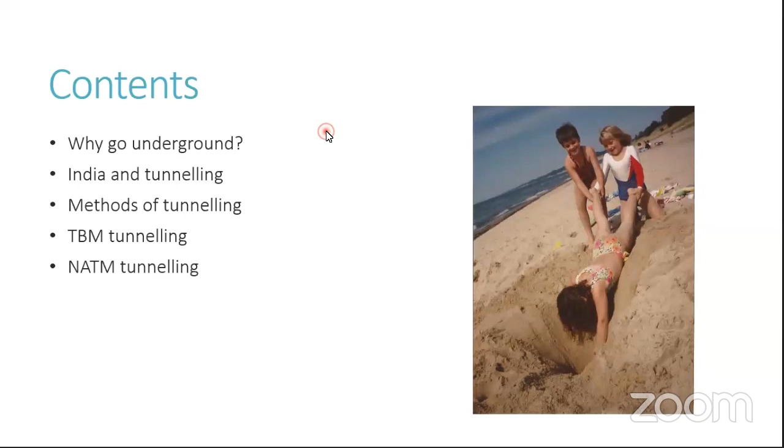This brings us to why do we want to go underground? Why are we exploring the space underneath the ground surface?

As per the predictions, the world population growth is a phenomenon that has seen a few peaks in previous centuries, when we started agriculture, and then another peak when the medical revolution came in. Further, when the industrial revolution kicked on, and now we are seeing another peak, another drift in the population, and this time the population rise is much more in developing countries than in developed countries.

So India, being one of the largest countries, is going to see a rise in population, which will put a lot of demand on infrastructure, to move those people, to provide housing for them, to provide transportation networks, to provide developmental opportunities, healthcare infrastructure, education infrastructure, offices, and much more.

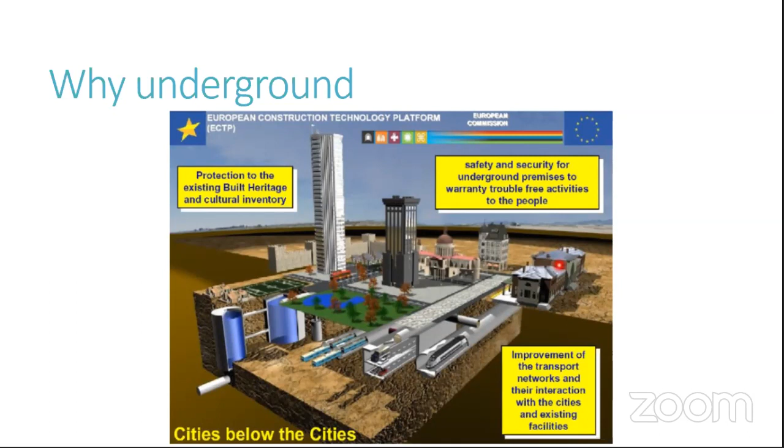We have other communication and electrical signal cables running underground, and by putting all this below the ground surface, we can actually create spaces on the surface for people to enjoy and celebrate the spaces around them. So we can create parks, lakes, playgrounds, parking lots, spaces for people to walk, and spaces for people to gather and celebrate. So it opens up lots of opportunities in future to come.

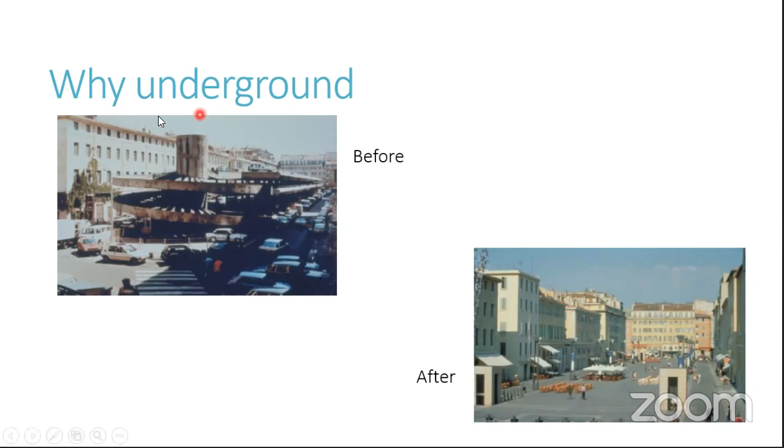As you can see, there is a photograph of one of the parking spaces in the middle of a very congested city. There used to be a multi-level car park, and you can see there is hardly any space for vehicles to move, and it looks very congested. But one artist's impression shows that if we move that car park underground at the same location, we would have so much space for open air restaurants and for people to walk, and it looks so much better if we imagine this space without this big structure, which can instead be put underground.

Further, this is one of the works that has been done in one of the European cities. Earlier everything was overground: there was a tram running on the road, a road in this market, and electrical cables running here and there, which nearly corresponds to what we have in many crowded urban markets in India.

Later on, all this space - the trams, the roads, everything - was put inside the ground along with the electrical cables. Now there are trees on the top. The surfacing has been done for people to walk and cycle around, with some art sculptures installed there. So it looks completely different and very beautiful, which gives people peace of mind living in such a space.

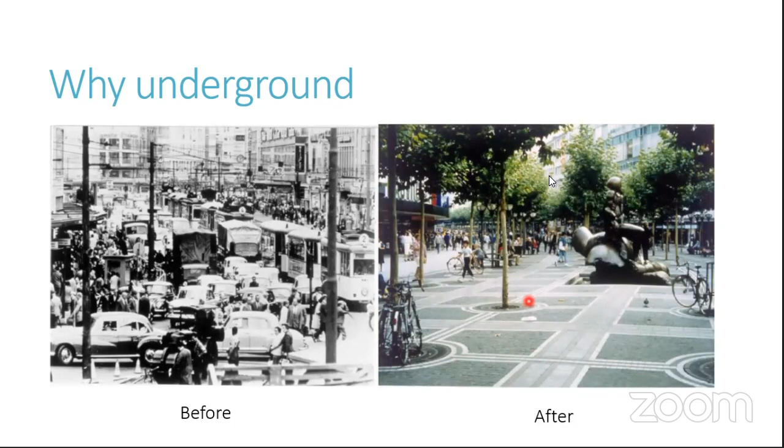India is a fast-growing market for tunnel construction. China is the largest market as of now, but India is also catching up, and there is a lot of scope for road and rail tunnels, which we are hearing about in the news very often.

Then there are metro systems. We have around 30 cities where underground metro systems are proposed, and many of them are under construction as well. High-speed rail projects - we know there is 22 kilometers of underground tunneling in Mumbai for high-speed rail. Then we have smart city concepts, hydropower tunneling, which holds the maximum share of tunneling projects in India, and water supply and sewerage tunneling.

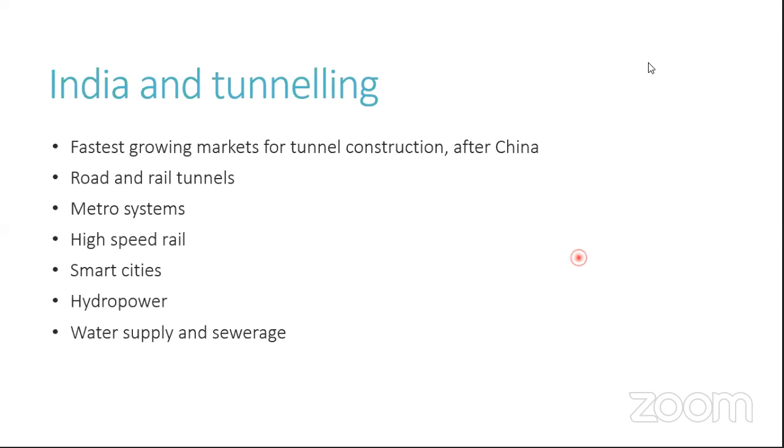As far as road tunnels are concerned, I have gathered some long tunnels which are already under operation, and then the Banihal Qazigund Road Tunnel, which is also quite a long tunnel. And we know the road tunnels in the Mumbai-Pune Expressway, and there are so many road tunnels that exist around us and are under proposal as well.

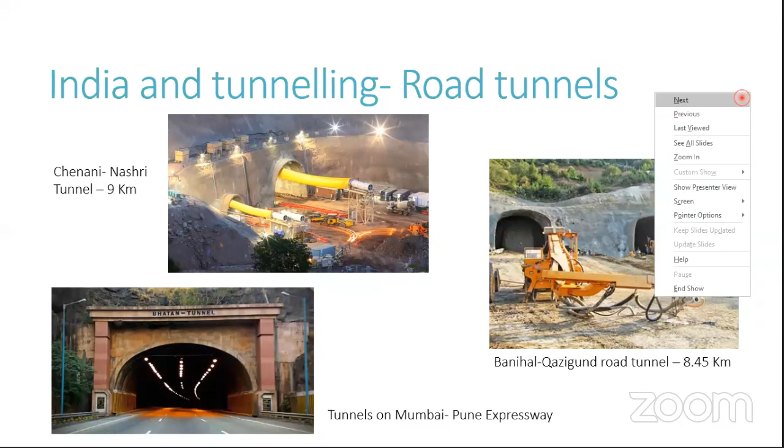A few examples of rail tunnels from Konkan Railway, and railway tunneling in the Himalayas - for example, the Pir Panjal Railway Tunnel. You must have heard of it - it's a very famous tunnel, the longest operational tunnel in India as of now. And then there is another tunneling activity being carried out in the northeast states of India, in the Tupul-Imphal section. So there is a lot of tunneling going on for various reasons across India, for both rail and road transportation.

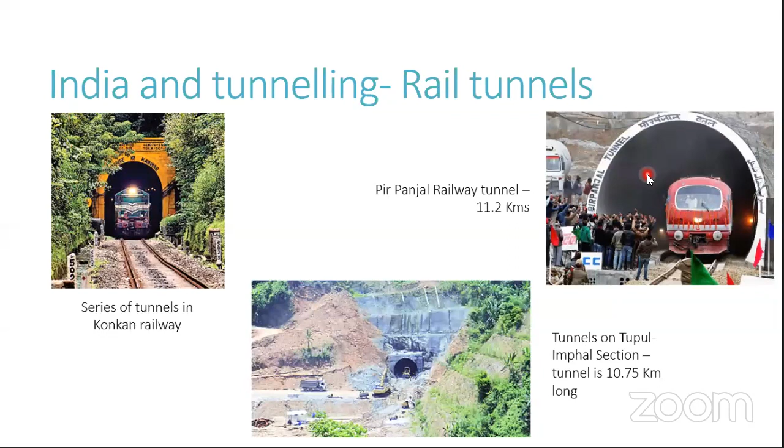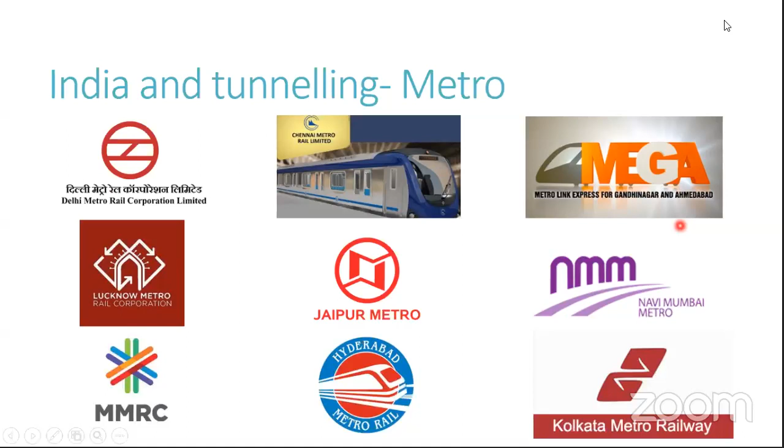Then we know that there are so many metro tunnels under proposal and under construction, like Delhi Metro, Lucknow Metro, Mumbai Metro, Jaipur Metro, Chennai Metro, Hyderabad Metro, Navi Mumbai Metro, Mega Metro for Ahmedabad and Gandhinagar, Kolkata Metro, and much more. There are so many to name. So there is huge potential and a huge way forward.

Then we have high-speed trains, which are already under proposal, with a few underwater tunnels proposed as well, along with other forms of tunneling. There are many tunnels planned between Ahmedabad and Mumbai, and long tunnels in Mumbai to reach the main rail station.

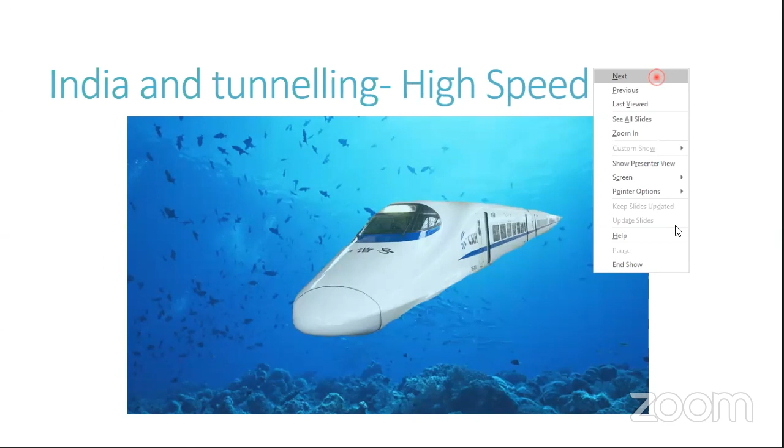Then we have the Smart Cities Mission, which aims to build smart cities in India, and each smart city is going to have its own efficient transportation system. Most of them will have metro systems proposed for them as well.

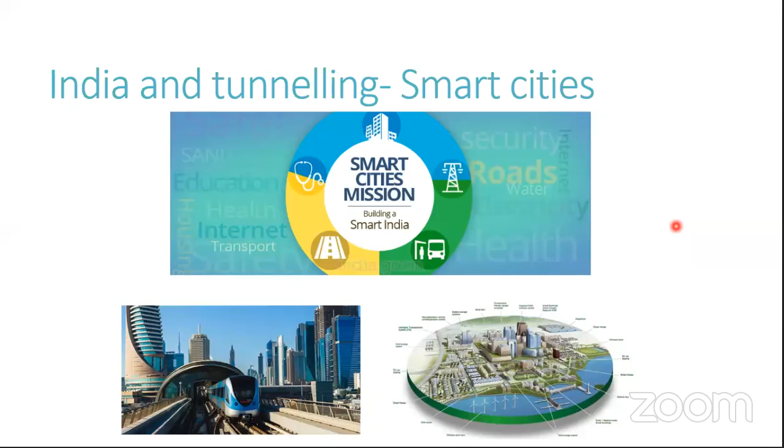Then we should move to the methods of tunneling. There are various methods of tunneling in India. Some of them are open face methods, some are partial open face methods, cut and cover methods, mechanical excavations, immersed tube tunneling, jackbox tunneling, pipe jacking, micro tunneling, horizontal direction drilling.

In open face construction methods, we have manual excavations with timber headings. We have open face excavation with linings like steel, graphite iron, or iron linings, which was very common earlier in European countries. We have drill and blast technique, which is part of NATM or SCL methods of tunneling. Then we have partial face boring machines like road headers, shield tunneling, and full face excavations with use of tunnel boring machines.

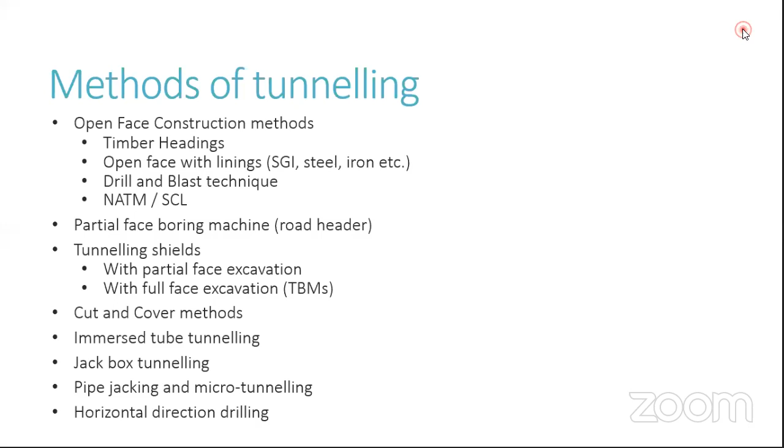Today we will not be discussing all of them, but we will be focusing more on the NATM method of construction and constructing tunnels with TBM methods. So we will first focus on NATM tunneling methods.

NATM stands for New Austrian Tunneling Method, which was developed in the 1950s by Austrian tunnelers. What it signifies is that it is a flexible and observational approach. To explain what exactly it means, I would like to go back to the history of why this method was developed.

So in the early 1900s, rapid industrialization was going on, and every country was investing lots of money to bring resources from the backward, poor, or developing countries, which were colonized by the European countries, to develop industrial activities in their own countries, which later led to World Wars. By the Second World War, every country had lost a lot of money, and industries and economic structures were shaken due to the huge investments put into the war and the destruction that was caused.

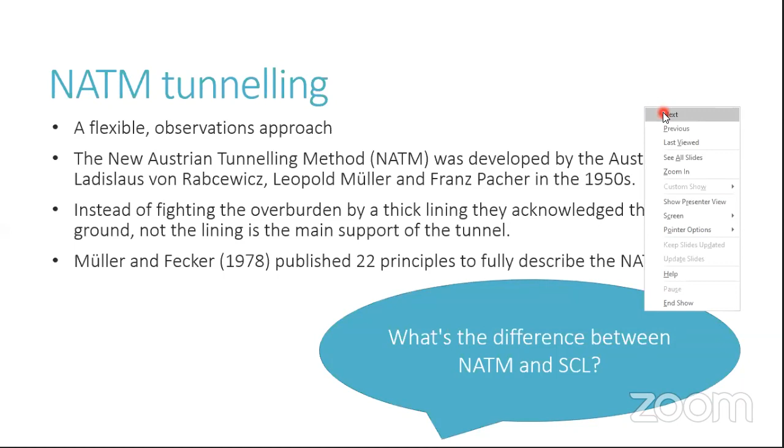As I have already discussed, SCL or NATM is known by other names as well, such as conventional tunneling, drill and blast, sequential excavation methods, and many more. But they are more or less the same, except for minor modifications proposed by each country or professional, which they have found during the tunneling process.

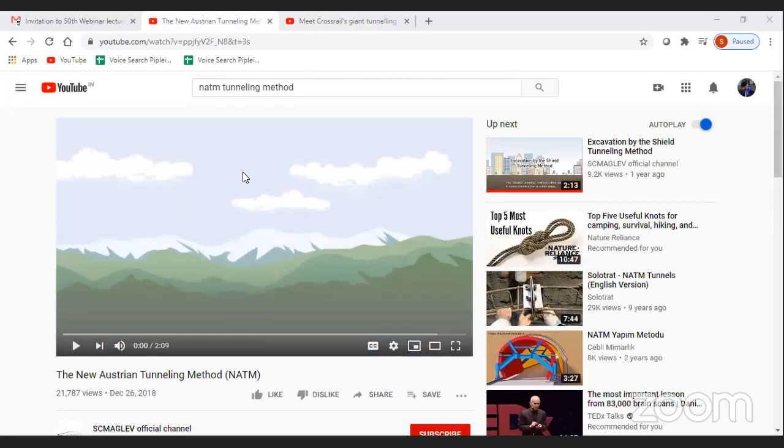Yes, sir, it is good.

The NATM, a standard method for building tunnels in mountainous areas, uses the geological...

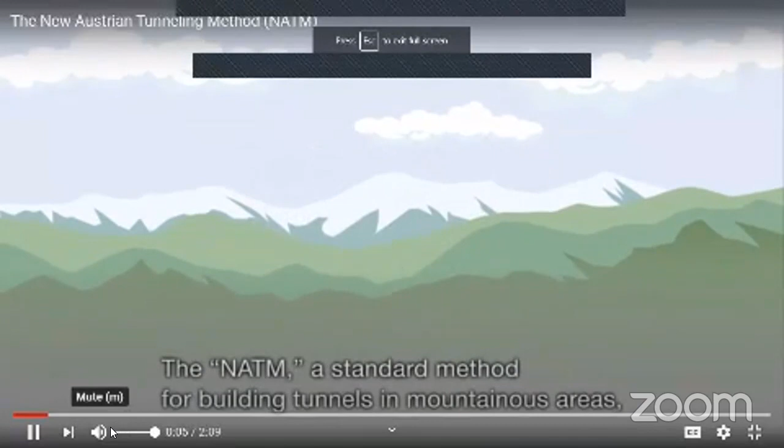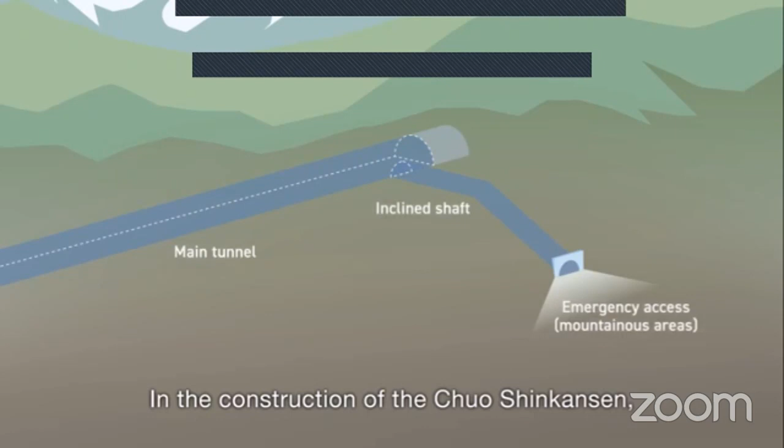Stress from natural ground around a tunneling site to build a tunnel safely. In the construction of the Chuo Shinkansen, this method is used primarily in mountainous areas. The NATM uses machines and explosives to excavate natural ground.

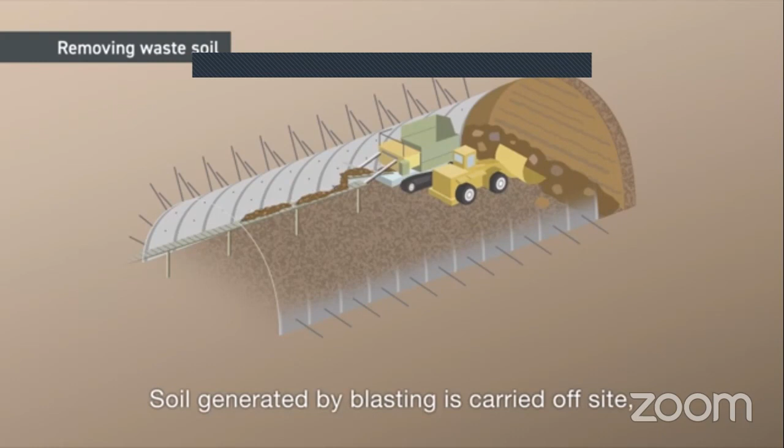When using explosives, a machine called a drilling jumbo is used to drill into an excavation surface and fill it with explosives. Soil generated by blasting is carried off-site using a dump truck or belt conveyor.

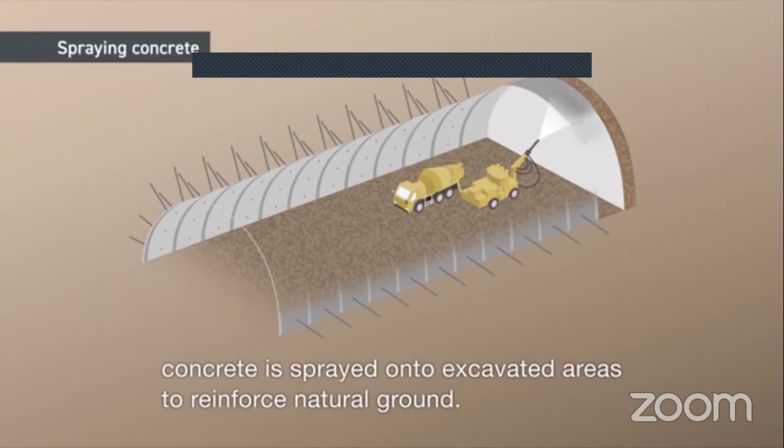After excavation, concrete is sprayed onto excavated areas to reinforce the natural ground. Rock bolts are then used to integrate the tunnel into the natural ground.

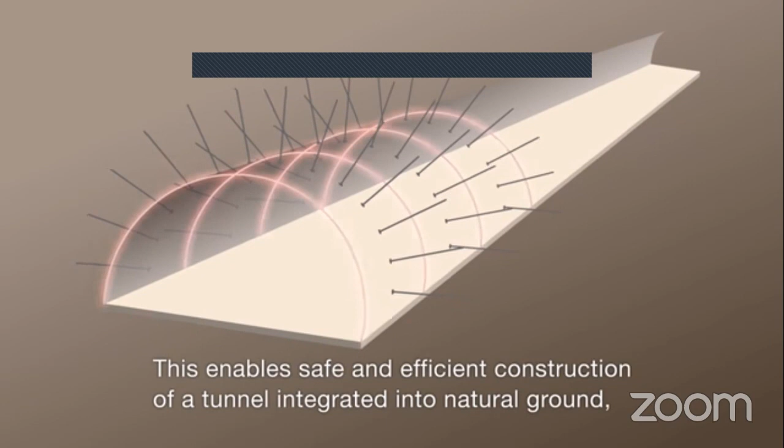Depending on the conditions of the natural ground, arch-shaped steel material is used for reinforcement. This enables safe and efficient construction of a tunnel integrated into natural ground, using the geological stress of the surrounding soil.

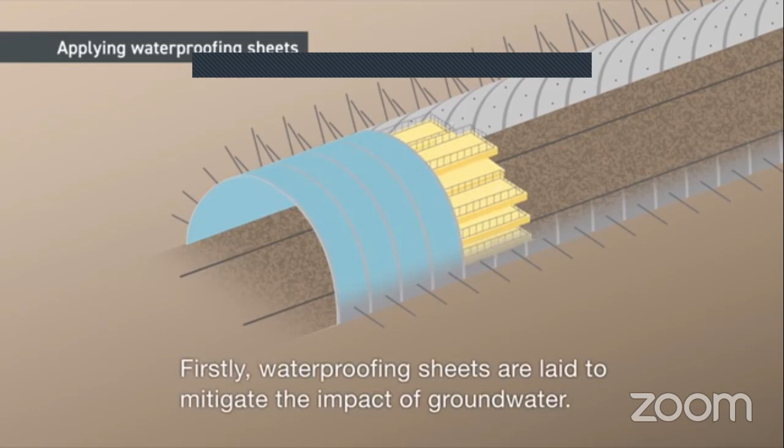Excavation work can proceed at the front, while finishing work follows along at the rear. Firstly, waterproofing sheets are laid to mitigate the impact of groundwater.

Next, lining concrete and track bed concrete are applied in that order. Tunnel construction is completed through these processes.

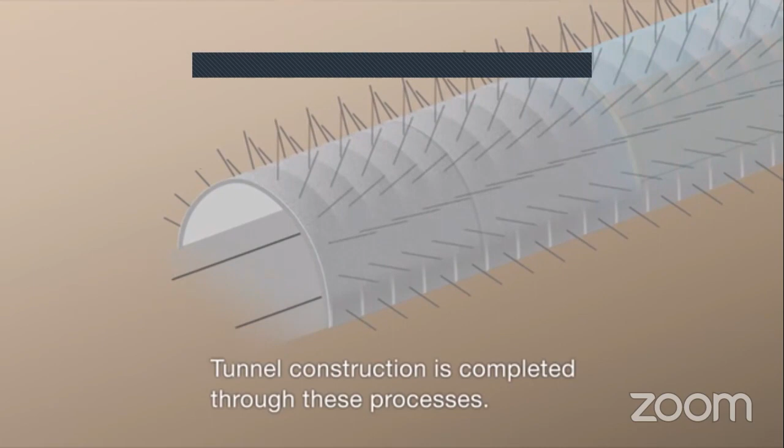The tunnel of the Yamanashi Maglev line, which already offers passenger rides, was also built by the NATM.

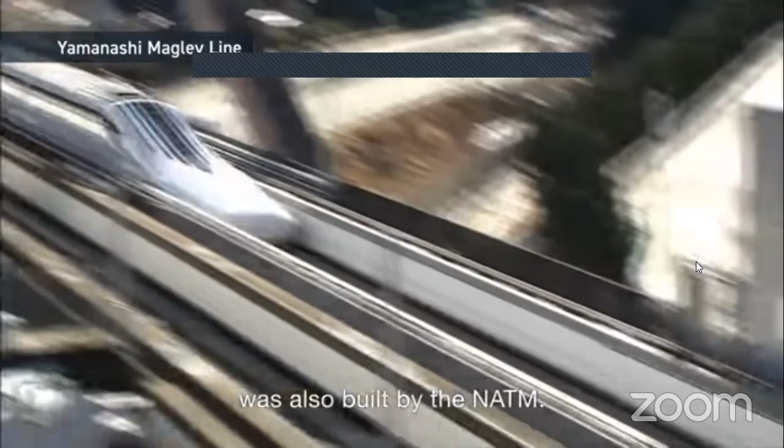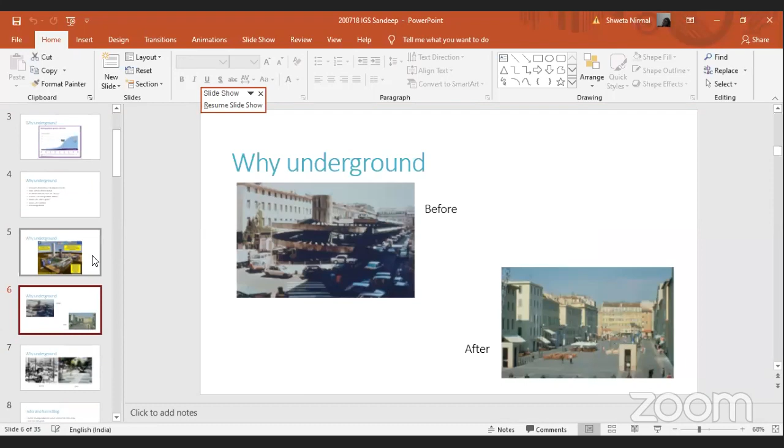So I hope this gives an idea of how tunneling by NATM construction is carried out. So I'll continue where I left off.

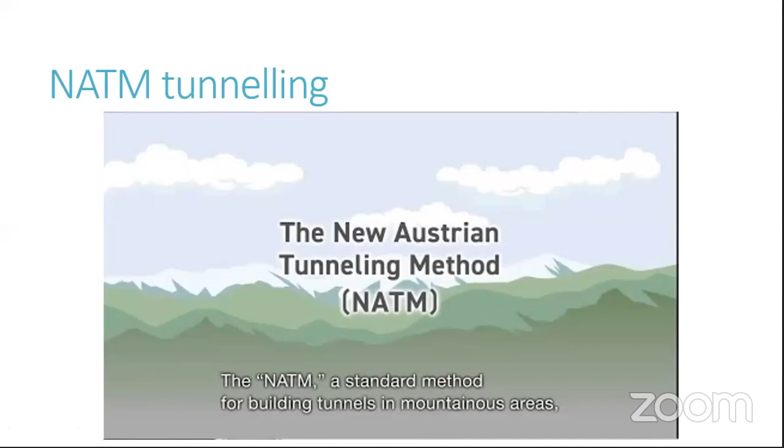So what happens is, when we go into the ground, we provide different types of supports such as shotcrete, rock bolts, lattice girders.

And sometimes stiffer supports like pipe roof umbrella, to stabilize the ground. And all these supports are called primary supports.

Later on, we finish this primary support after putting a waterproofing layer. We put a permanent lining, which is the permanent support, durable for the project life of the tunnel, which we can say is nearly 100 to 120 years.

So the excavation can be carried out as a single phase or multiple phase excavation. If it is a smaller tunnel, then we can go for a single phase excavation.

And if it is a larger tunnel, then we can imagine that excavating such a huge volume in one go may destabilize the ground. So we have to go for multiple phases.

Along with the area of excavation, the geology also plays an important role. So if it is weaker ground, then we have to divide our excavation phases so that we stabilize each pocket while we move forward. And if it is competent ground, we can go for full phase excavation.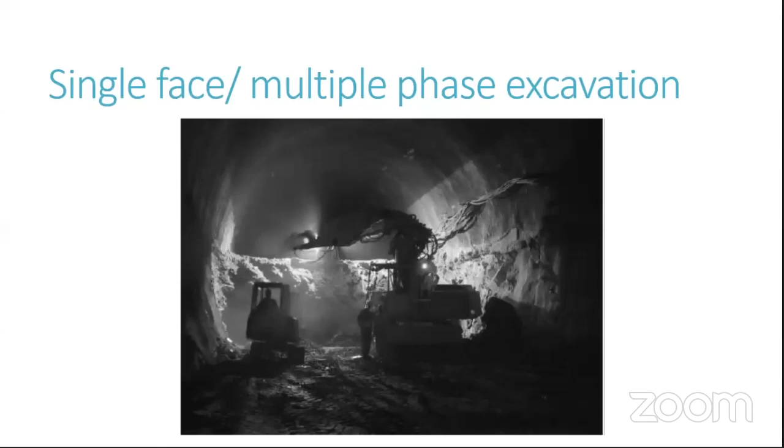So all this is analyzed while the design is made, and the excavation phases and support systems are worked out according to that. So we can see that it could either be a single face excavation.

Or we can do excavations in invert, benching and heading, in multiple drifts, in side drifts, or we can do a pilot access tunnel in between first and then enlargement to the size of the main tunnel.

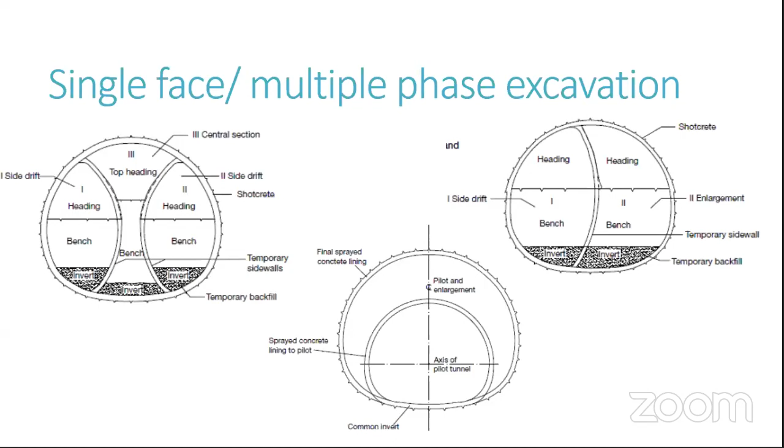When we design NATM tunnels, what we do is in software we simulate the excavation and support steps. In step 1, we generate the in situ stresses of the ground, and generate the overburden loads if there are any over the tunnel.

We know that while the ground deforms, it has an elastic limit of deformation until which the ground will not fail. After that limit, it will move to the plastic stage, and that's where we assume the ground has failed, and we do not want the ground to move any further.

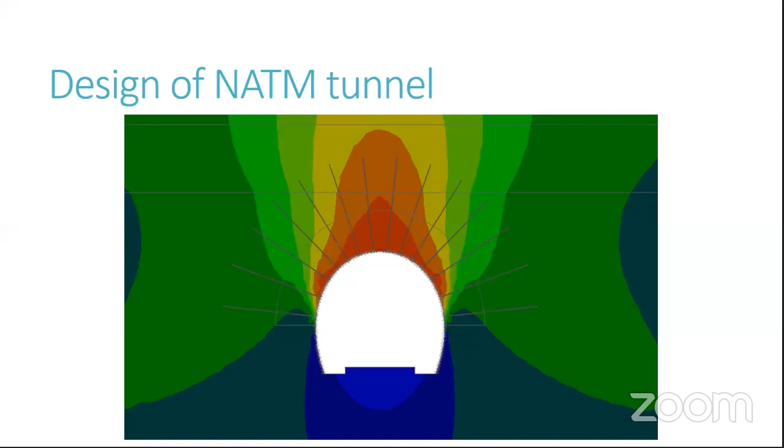So in all these design simulations, we understand when and how much support we require to stop the ground from being plastically deformed. You can see in this photograph, along with the displacements, we have put some rock bolts and shotcrete to understand whether the ground will be stable during excavation.

Now, when all this is calculated from the design, we need to understand how to implement it on site, to ensure what we have done in design is actually overlapping with what is going on at the construction site. We monitor the tunnel excavation throughout construction after every excavation advance.

We put some displacement markers along the profile of the tunnel. You can see there are 5 markers here across the tunnel profile, showing how they are moving with time. The readings were taken at different times, showing how they moved after the excavation.

This depends on how the field stresses are present at that point of the ground, and we compare these displacements to the displacement we thought we would achieve during the design phase, to check if the proposed support system is sufficient, or if we need more support, or need to reduce the support during construction.

So after each advance, a geologist has to go to the site, to the face, to understand what type of rock is there, and reassess the designer's recommendation on the support, and whether any modification is required in the support itself.

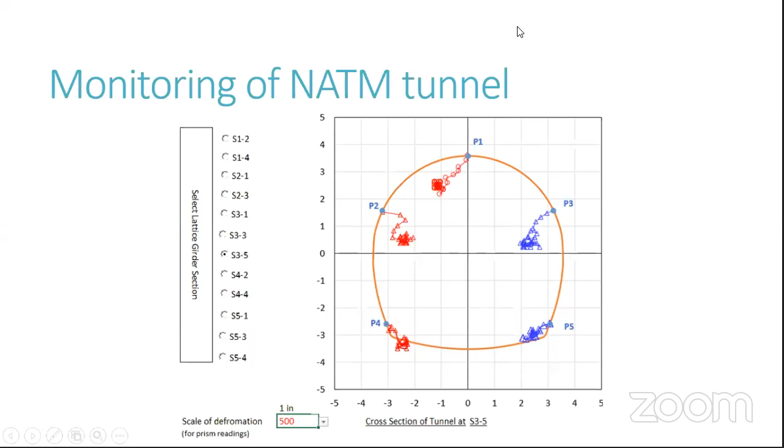Moving on to the next slide. Apart from monitoring the deformation on the tunnel profile, the deformation in urban areas, it is important to measure the deformation on the ground surface as well.

When we start excavating the tunnel, the effects of the movement of the ground are shown on the ground surface as well, which may lead to differential settlements of buildings or any underground tunnel nearby to the proposed excavated tunnel, or any utilities around it, such as a gas pipeline, water pipeline, or sewage channel. Due to differential settlements, they may crack and these structures may lose their integrity.

So we need to monitor the surface settlements as well, and we review the support requirement of the tunnel if we are crossing the surface settlement limits.

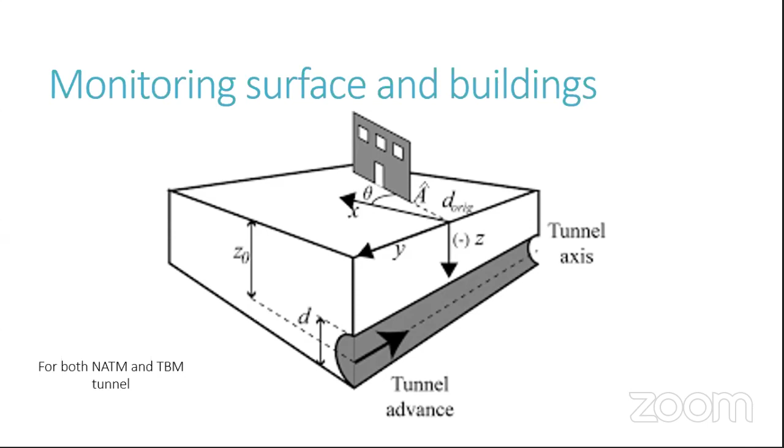If the settlements are large, we increase the support system - increase the length of the rock bolts, number of rock bolts, shotcrete thicknesses, lattice girders, pipe umbrellas - anything which would bring us back to the same stage of construction. This phenomenon of surface monitoring is equally applicable for TBM tunneling as well.

Moving on, this brings me to TBM tunnels now. Somebody once said to me that a tunnel boring machine is not just a machine, it's an industry in itself, which is actually true. It is wonderful to see how so many mechanical, electrical, and civil concepts come together to create this machine, and there is a cutterhead on the front.

The steel is so hard and robust that it cuts the ground of all types. Even one of the hardest rocks can be cut using TBMs now, continuously throughout the year, and it can go on for years as per the design, which brings us to notice how robust this machine is.

Then we have a shield - an automatic shield which stops the flow of water across the tunnel, provides a seal across with the ground, and gives the grouting across the tunnel line.

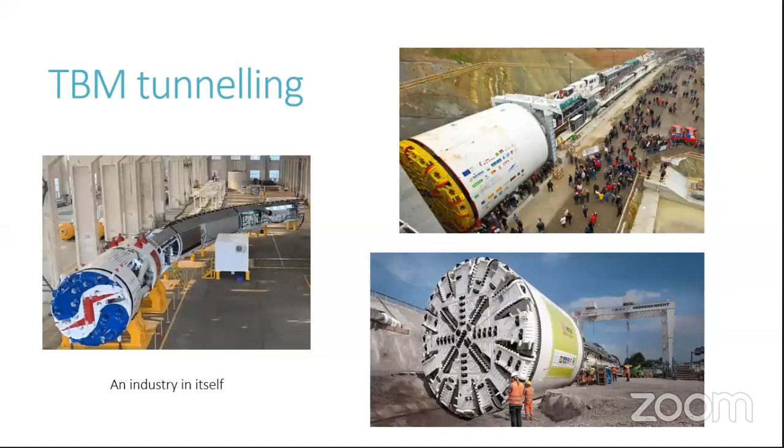As I have already explained a few components of it, we have a strong robust cutter head on the front, then we have the front shield, which does not allow the ground to collapse just after the excavation. Then we have main thrust cylinders, which push against the TBM lining so that the machine can move forward. Then we have torque cylinders, which move the motor of the cutter head.

Then we have the telescopic shield, which monitors where the alignment of the TBM tunnel is going. So if the TBM tunnel is deviating from the proposed alignment, it signals the operator that they need to modify the radius of the tunnel so that the machine can move in the right direction.

Then we have the tail shield, which allows a seal between the ground and the tunnel so that water does not come in and the grout material, the cement grouting, does not come inside the tunnel. Then we have the erector, which is an automatic robotic arm that erects these segments to complete the lining, and then we have the segmental lining at the back.

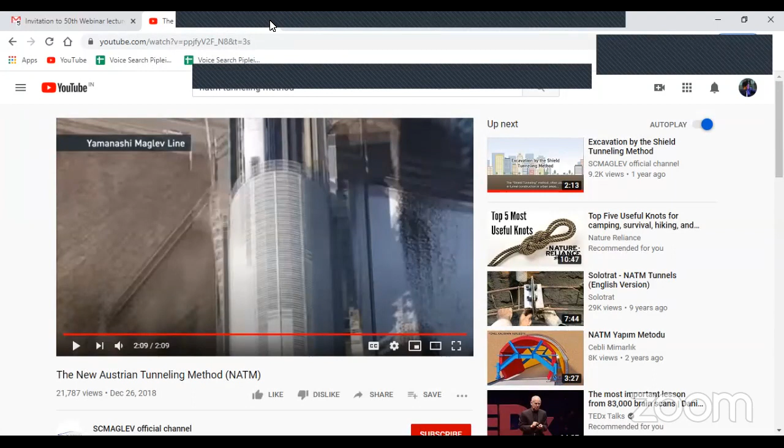This video will show us the working of two types of TBMs, which I will be illustrating later. There are many other types as well, but it's a very comprehensive video which will explain the amount of work the machine does while constructing the tunnel.

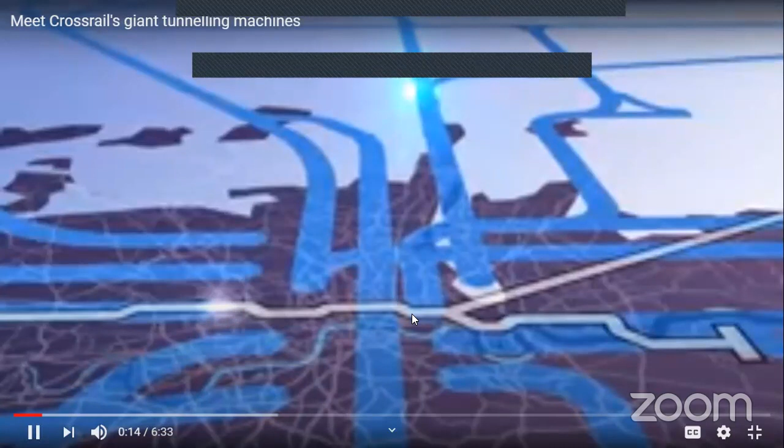When it opens in 2018, Crossrail will connect 28 existing stations to the West End, the City and Canary Wharf through 21 kilometres of new twin-bore tunnels under central London. 8 tunnel boring machines, or TBMs, will drive through the ground to create Crossrail's tunnels.

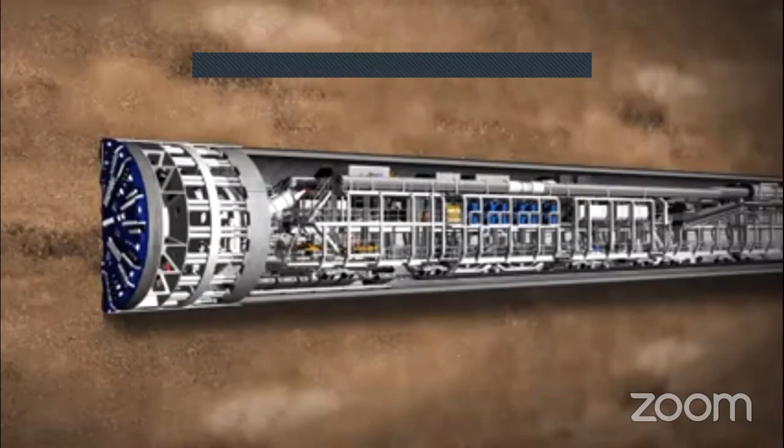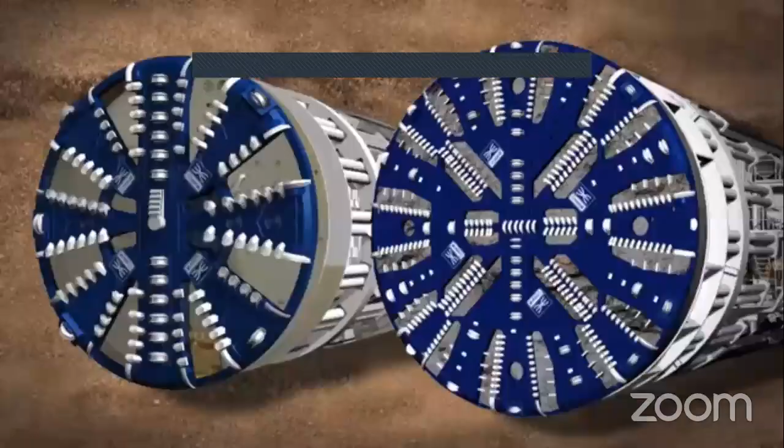A TBM is 148 metres long and weighs 1,000 tonnes. This is the equivalent of 14 London buses end to end and a staggering 143 buses in weight. It has a rotating cutter head at the front and a series of trailers behind housing all the mechanical and electrical equipment.

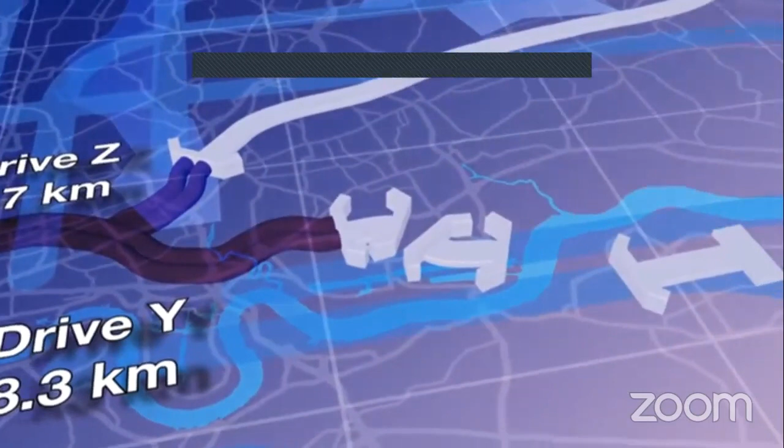There are 2 types of TBM being used by Crossrail: earth pressure balanced TBMs and mixed shield TBMs. 6 earth pressure balance machines will be used for the 18 kilometres of tunnel through the clay to the west and the riverbed deposits in the east, while 2 mixed shield machines will be used to drive the tunnels through the chalk beneath the River Thames.

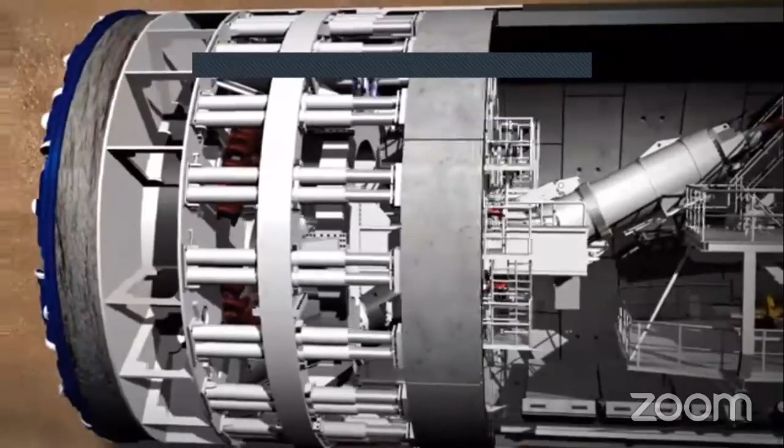Depending on the geology below and the buildings above ground, each TBM will travel between 90 and 150 metres each week, ending up to within a millimetre of where it needs to be. The first part of the TBM's work is the tunnelling phase.

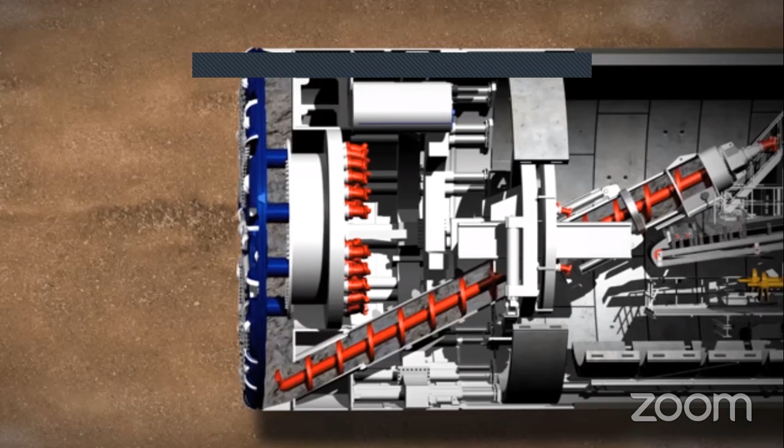The earth pressure balanced TBM has a cutting wheel which is pressed against the tunnel face by hydraulic cylinders. Inside the cutting wheel, the disc cutters and scraping tools loosen the material. If the earth is unstable, and to stop the tunnel face collapsing or digging too fast, the TBM uses the soil already dug out by the cutting wheel to support the tunnel face. This creates a stable environment for the tunnelling to move forward.

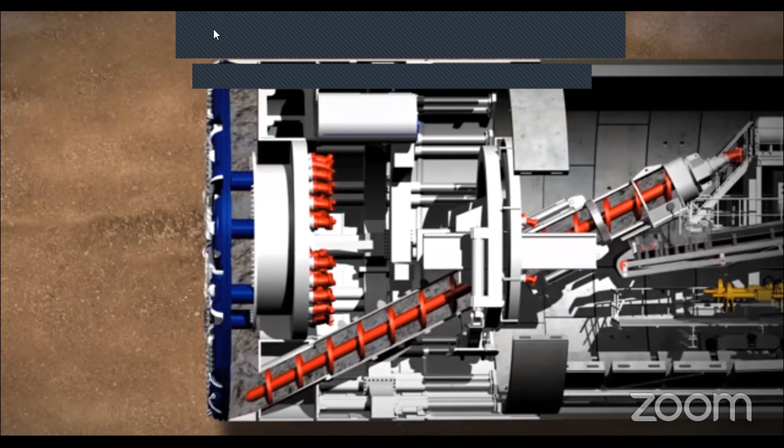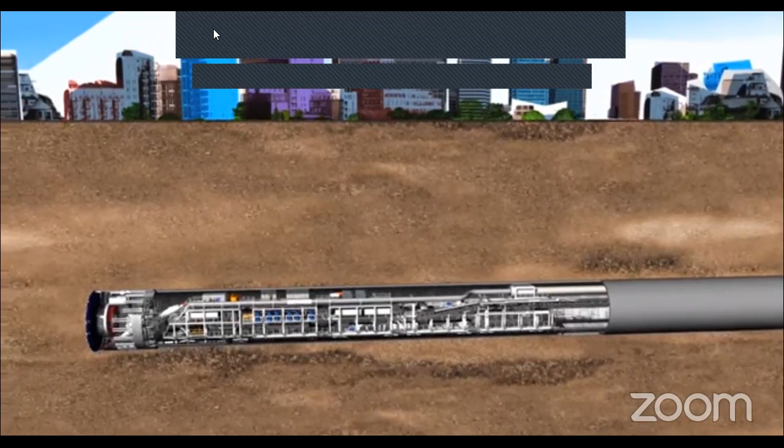The tunnel face is continuously monitored by pressure sensors. They check the turning power of the cutting wheel and the screw conveyor, and they also keep track of the material that's been excavated. The material is then taken away on conveyor belts. Once the tunnelling phase is done, the cutting wheel and screw conveyor are stopped and the ring building phase starts.

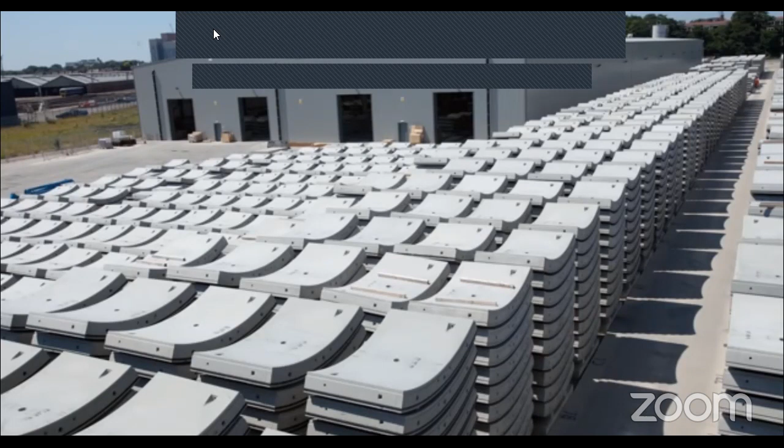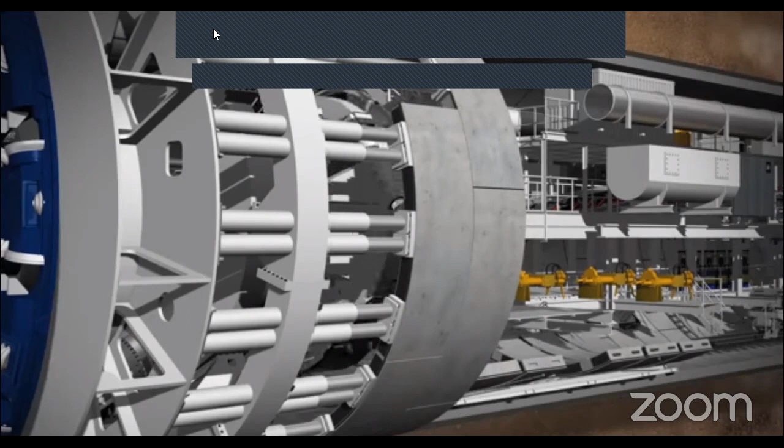A complete tunnel ring consists of several lining segments made of pre-built reinforced concrete. These are made in a special factory above ground and must match the exact size required, taken into the tunnel on flatbed rail cars. The concrete segments are fed in by the segment feeder and lifted into place using a vacuum. The hydraulic cylinders are temporarily retracted to provide enough space for the new segment. The segments are positioned with millimetre precision and held in place by cylinders before being finally bolted in.

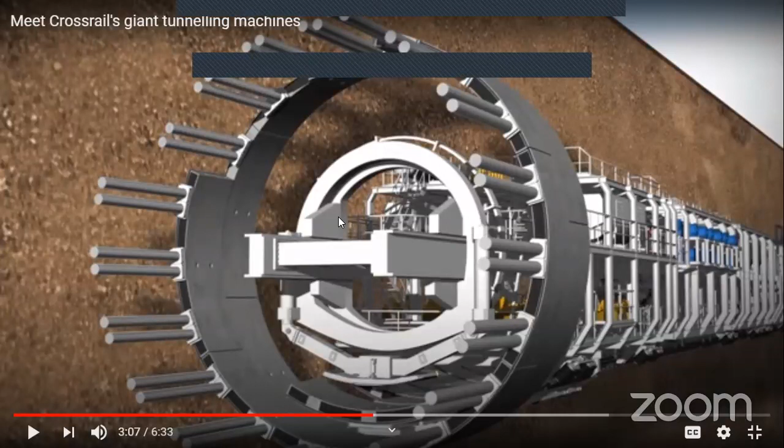Sir, the video is breaking for a while. Okay, I'll just try to share it again. Is it better now?

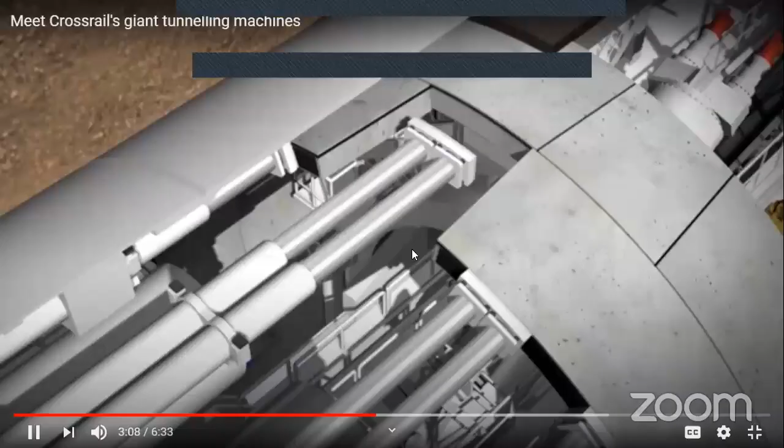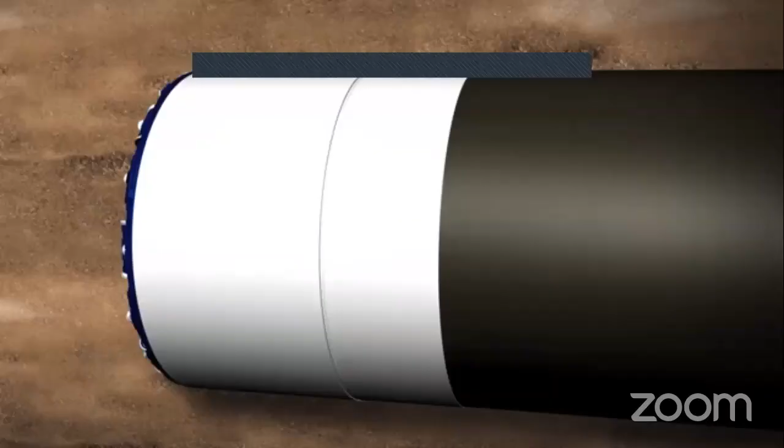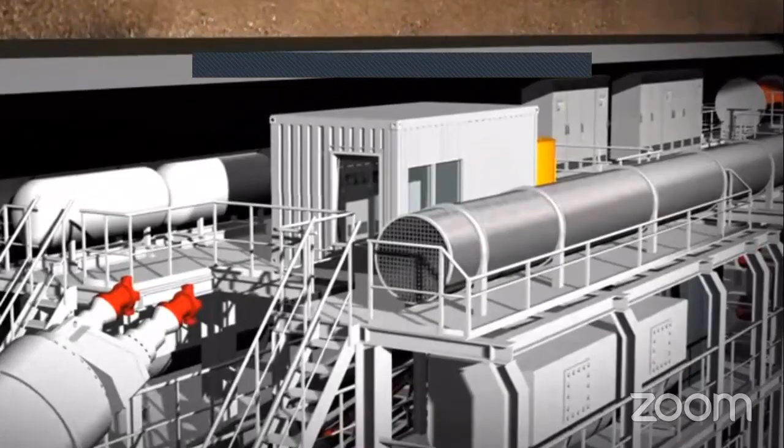The conical keystone is put in from the front, and the lining ring is complete. Each individual tunnel ring is built in a slightly conical form, meaning curves can be built along the tunnel route by changing the direction of the cone. The hydraulic cylinders are extended again to secure the segment into position. During all this work, people and machines are protected by the shield skin from the saturated ground where water is under pressure. All readings are displayed on monitors in the central control cabin and fed back to the machine operator. Once each section of ring building is completed, the next tunnelling phase can start.

The mixed shield TBMs dig in a different way to the earth pressure balanced TBM and will be used for tunnelling in waterlogged conditions such as below the Thames. Mixed shield TBMs use bentonite, a slurry of clay and water, to support the excavation face and act as a suspension medium for excavated material. The excavation chamber is behind the cutting wheel and separated by a submerged wall from the working chamber. The excavation chamber is completely filled with bentonite and the working chamber is approximately two thirds filled. The two chambers are connected in the form of communicating pipes via an opening in the submerged wall. A filter cake is created ahead of the cutting wheel by pressurizing the bentonite in the working chamber with compressed air. The bentonite penetrates the ground to form a membrane which holds back water. Changes in the soil can be handled by adjusting the pressurization.

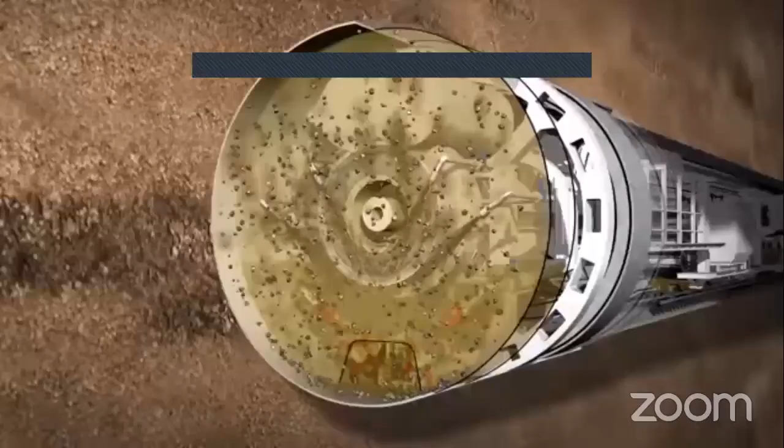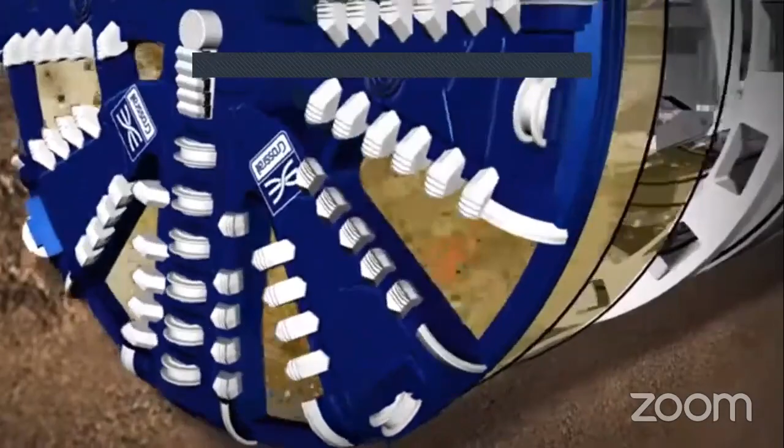The dugout material falls into the excavation chamber. Small grains dissolve into the bentonite and bigger stones and debris fall to the bottom. Flushing nozzles guarantee smooth removal of the excavated material, which is pumped through the suction line to the separation plant at the surface. Here, the soil is separated out and removed from the bentonite suspension through a centrifuge, and the clean suspension is transferred back into the slurry circuit. As tunnelling advances, the flexible extension lines are installed to extend the lines after each thrust phase.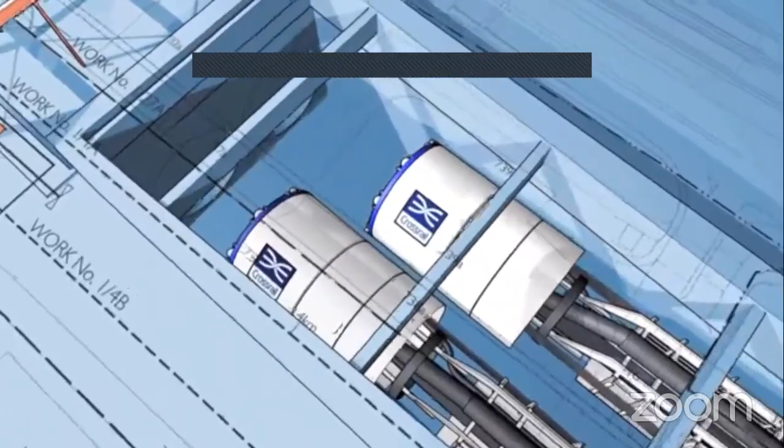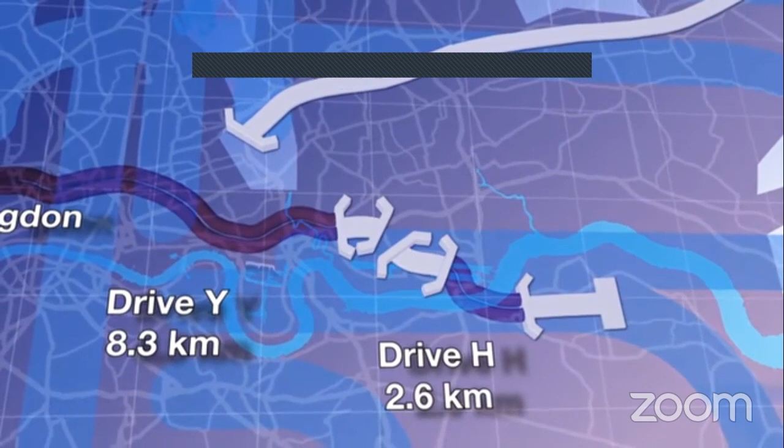Crossrail's first pair of TBMs, Phyllis and Ada, will construct Drive X, travelling from Royal Oak to Farringdon. A second pair of TBMs, Elizabeth and Victoria, will construct Drive Y, starting from Limmo in Docklands and heading under central London to Farringdon. A further two TBMs, Mary and Sophia, will construct the tunnels for Drive H, running underneath the Thames from Plumstead to North Woolwich, followed by Drive Z and Drive G. All the tunnels will be completed by the end of 2014, a significant milestone in the programme to build the largest addition to the South East rail network in 50 years.

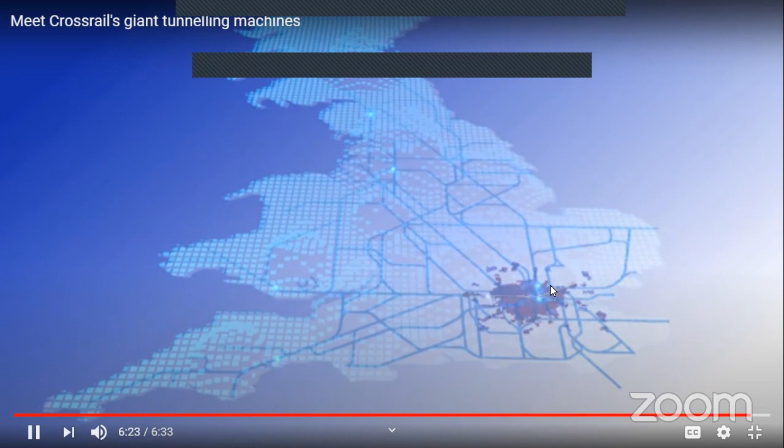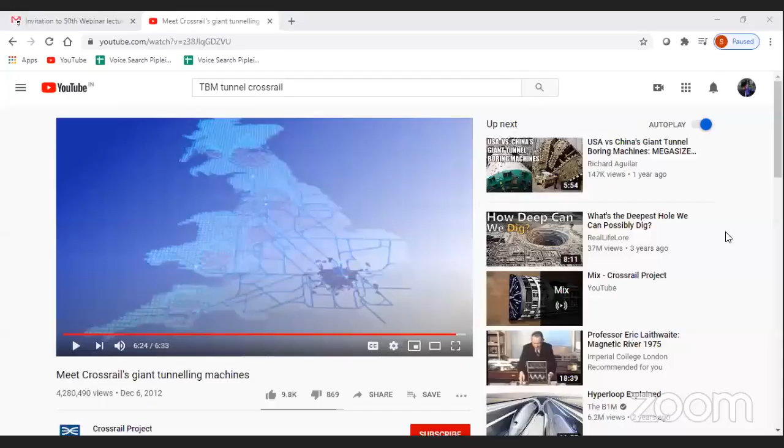I hope the video was self-explanatory, and we found how EPB and slurry TBMs work and how they are. There are other forms of TBMs as well. I will move on to explaining those.

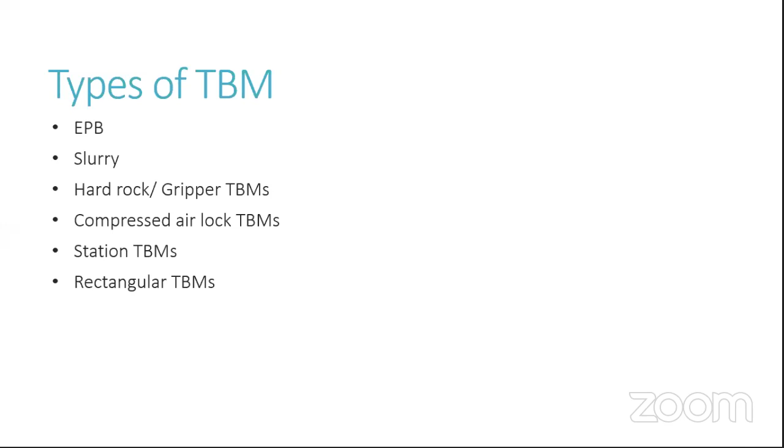So we already know about earth pressure balance machines and slurry machines. There are special machines to work in hard rock, because the transportation of loose material and hard rock material is different, and excavation is also different from other TBMs. These are customized for hard rock, and some of them are called gripper TBMs. We have compressed air lock TBMs, specially made for underwater tunnels or tunnels where water pressures are very high, such that the front chamber of the TBM has to be air locked so that water doesn't come in. Then we have station TBMs and rectangular TBMs for underpasses.

Moving on to the hard rock or gripper TBM, it looks more or less like the other TBMs, but the main difference is that the shield on the back is not too long, because the rock TBM is considered operational in hard rock strata, where the strata is self-standing and after excavation the rock will not fall. We have these red grippers, which after each excavation grip the ground, and the TBM is pushed against the force generated after gripping the ground.

We do not have any TBM erectors on the back, because there is no need of TBM lining. This TBM has a spray concrete facility on the back, which sprays the concrete so there is no need of segments. It will just be the sprayed concrete and the tunnel will be finished. So it's a unique TBM, and this was used in the Gotthard Tunnel in Switzerland and many other tunnel projects as well.

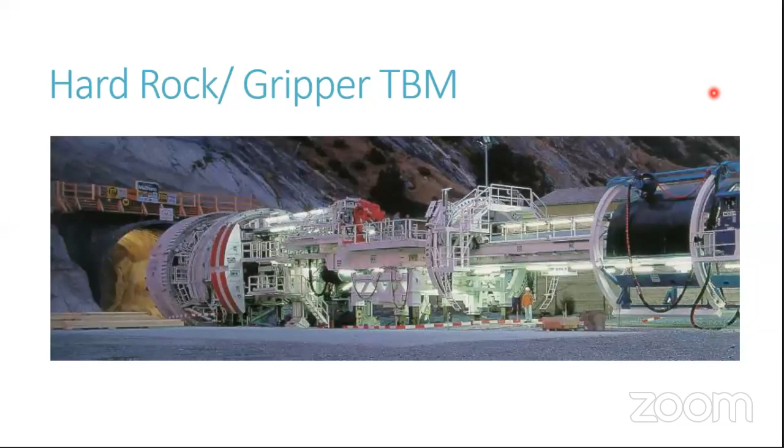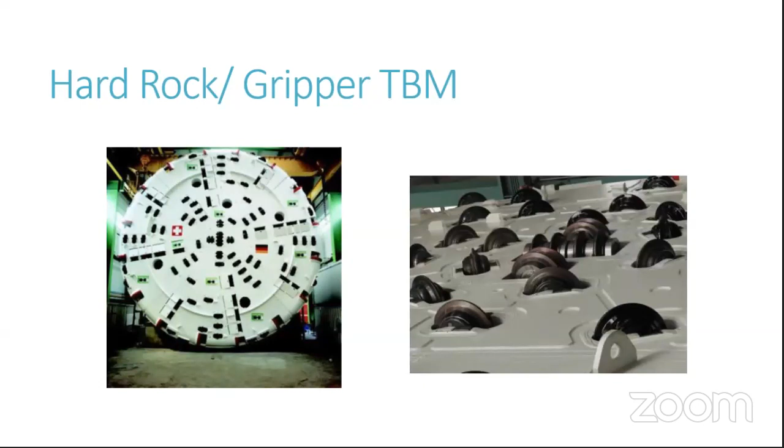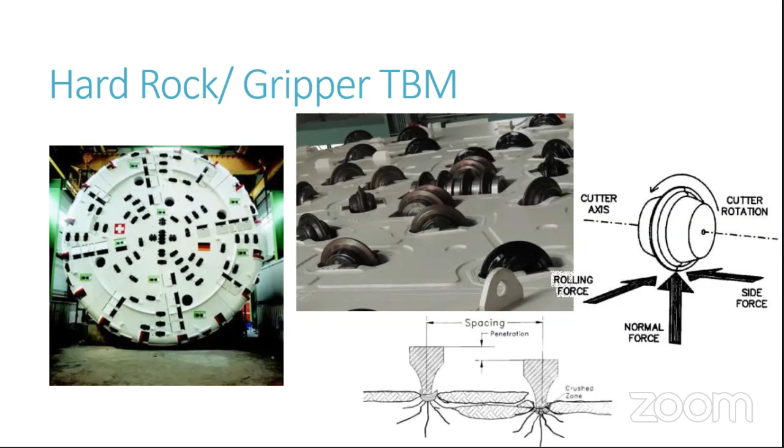Talking more about the hard rock gripper TBMs, you can see that the cutter head for hard rock TBMs is different than the one shown earlier, because for hard rock we have round disc cutters at the front, so that they push the hard rock as a point load and break the rock in front. Each of these discs produces a normal force on the ground, and this force crushes the zone in front of the cutter head, leading to fragmenting of rocks and then collection and transportation later on.

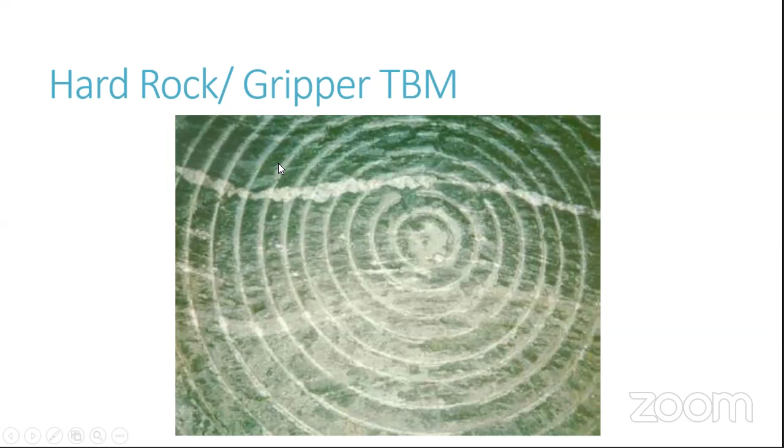And a beautiful image which you can see in front of the TBM - all these discs create a circular pattern, and it looks amazing. You can see that there is a band of white rock in between, a filling in the gap, and the rock is quite intact.

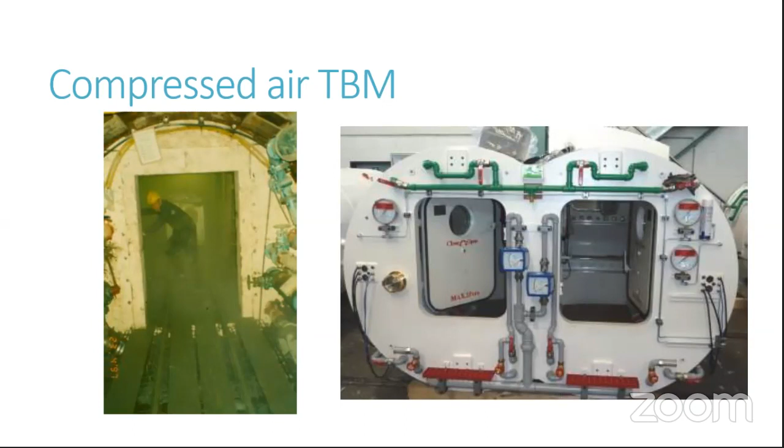Moving on to compressed air TBMs, there is an airlock, a manned airlock, fit on the front part of the TBM. If intervention is required, a person can go in, and the pressure is raised higher than the pressure of the water outside, so that water does not come into the airlock. People can work there, do interventions on the TBM, change cutter tools if required, do servicing or maintenance, and then come back. There are guidelines on how long people can stay at that pressure and when they have to come back, so it is safe for them at the compressed air construction site.

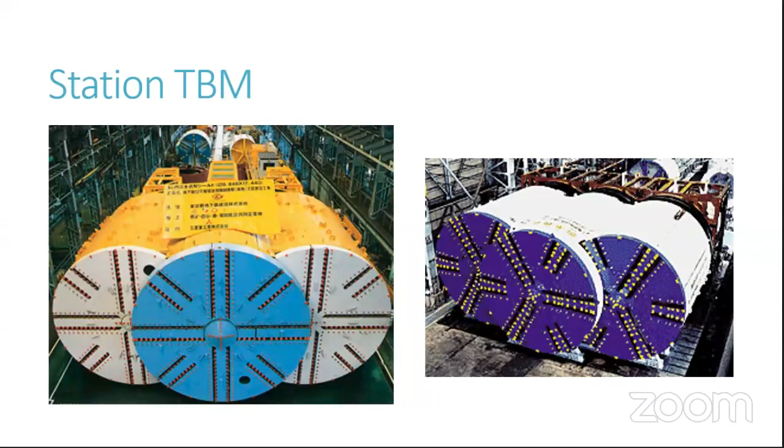Then we have recent innovations in China and Singapore to construct specialized TBMs for stations. These machines are specially customized to create tunnel boring tunnels with a wider cross section for stations, where there can be tracks for trains in the middle and platforms on the sides, thus reducing the requirement of a bigger TBM and saving lots of money on excavation costs and operation costs.

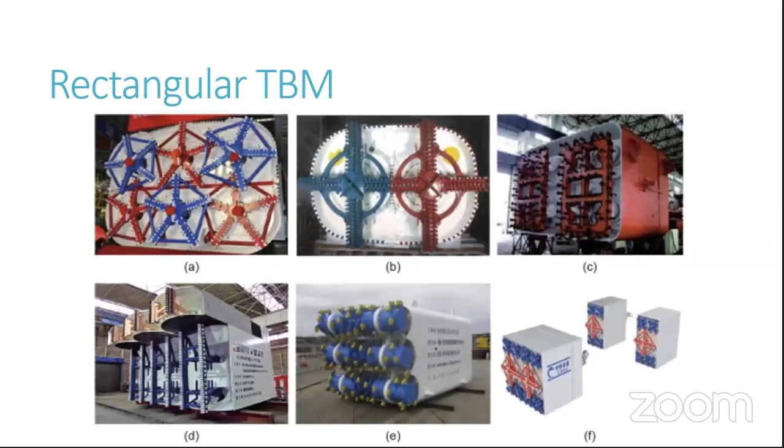Which brings me nearly to the end of the presentation. I have tried to summarize the overview of TBM and NATM. There are a lot more details, and each slide could be explained in an hour or two. If we go into detail, for today we will keep ourselves to the introduction of what these methods are.

Before concluding, I would like to share a little on the comparison between TBM and NATM, and when we should choose which one as the right way of going ahead. As we know, NATM is a very flexible method - there are small machines working on small parts, finishing with other small machines as well, which makes it a very flexible method to use in any location of the world, whether steep mountains, underground, underwater, anywhere.

But there are complications with NATM when the ground is not very good. Then we need to invest lots of money to support the ground, and it may become very expensive. The pace of excavation, the progress of the project may also go down. But in that case, TBM can be helpful.